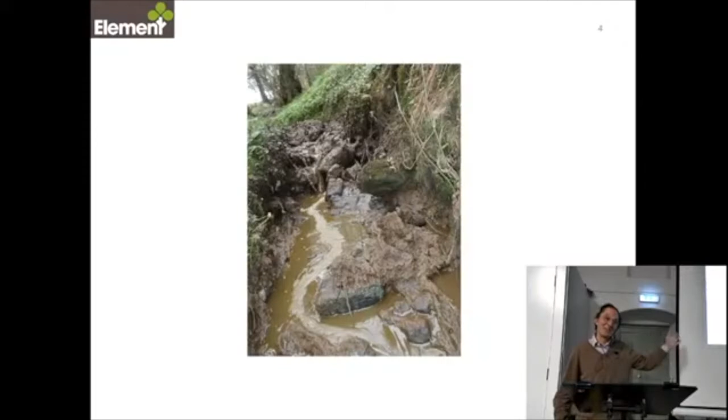So this is what we all think of when we think of water - lovely, clean, beautiful water. But this is what I usually think of when I think of water. It's not terribly clear, but basically it's a filthy sheugh. And that's the bit that I'm interested in, because this is out there pretty much everywhere you go. You only have to walk around a corner and there'll be another dirty field with pollution down the side of it. It's something that we need to sort out.

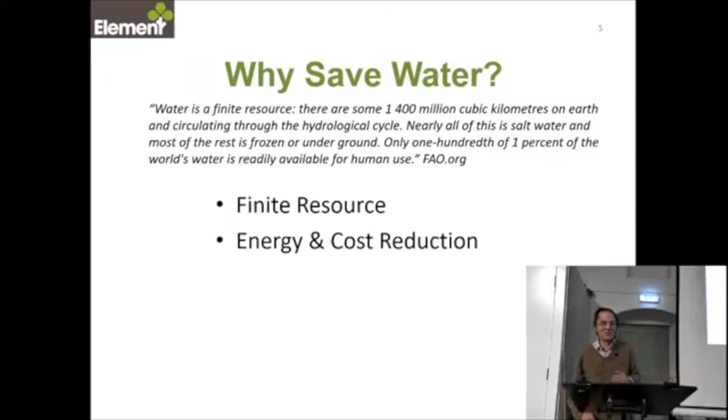So water is a finite resource. There is a limited amount of it on the planet, and there is a very limited amount of it that we can actually drink, that is readily available for us to use. So it is important that we save it. We also expend an awful lot of energy and a lot of money getting the water around the system. We spend an awful lot of energy and money treating the water when it's coming out of the system - actually we spend a lot more treating it. So we need to reduce those things because they're tied to carbon emissions, tied to carbon emissions. And obviously, it's all about protecting the environment.

Some of you may have heard of the water hierarchy, and this is what people talk about when they start talking about water efficiency. This is more of a commercial slide, but really what we're saying is, it's mostly common sense. Minimise the amount that you use at the front end.

I actually don't believe that the alternative water use should be where it is on that slide, so I'll come back to that in a minute.

Once we've eliminated everything, then reduce as much as possible, then reuse anything we can, then recycling, which is more on the commercial scale, and finally dispose of as little as possible.

So I mentioned alternative water use. I think that should be right down there, because I think it takes away from the fact that we should be minimising before we start to think of alternatives, and I'll come on to that in a minute.

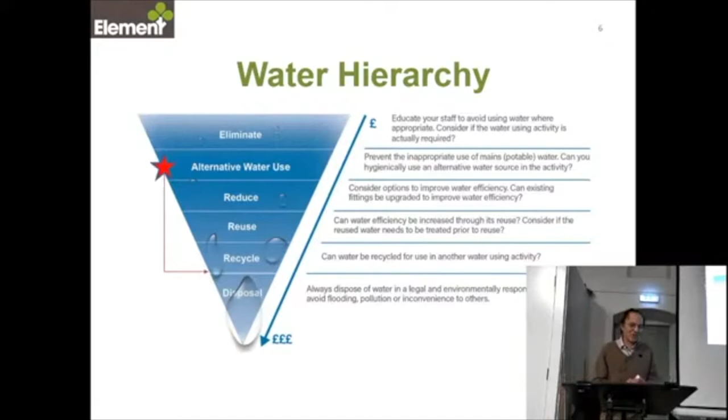And of course, we interrupt it on the way, use it, pollute it, chuck it out there again, treat it, mostly.

So what happens when the water hits the ground? We get runoff, and most of the water that we use is from runoff. In the countryside, 10% of the water ends up as runoff. In urban areas, 55% ends up as runoff. And then we wonder why we get flooding.

But also importantly, if you look at the infiltration, we get 50% infiltration in the countryside and about 15% when we're in towns. So anywhere that's urban, we're reducing the available water that is coming to us.

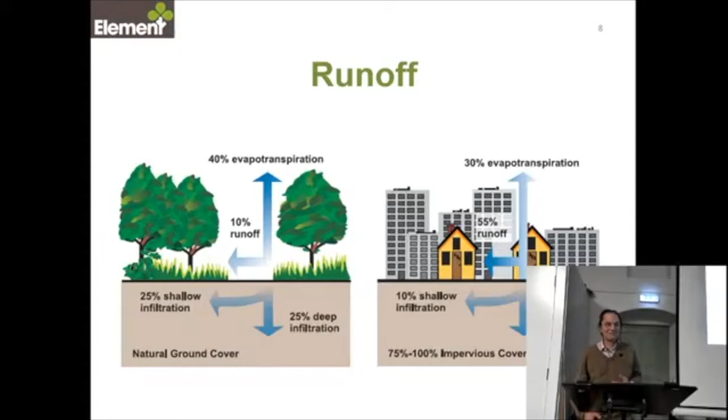Okay, so water sources. We all immediately think of the first one, which is mains water. And that obviously is water that has had to be treated and moved before it gets to us.

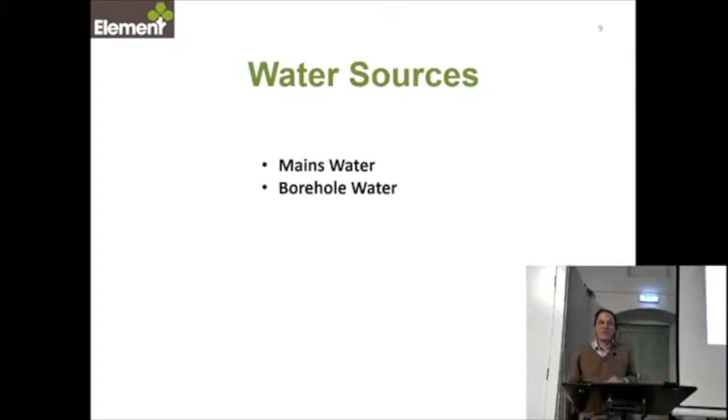We don't often think of borehole or borewell water unless we've had experience of it, but we actually use a lot of water from aquifers under the ground. This is water that sits generally in bedrock aquifers, although you can take it from what are called superficial aquifers as well. We'll come on to a bit more about that later.

Then there's rainwater, and rainwater harvesting is a big opportunity for reducing a lot of the water that we use. We don't do very much of it. Believe it or not, there is an incentive, which I'll mention later. But even simple things like water butts in the garden, instead of using mains water, can make a huge difference.

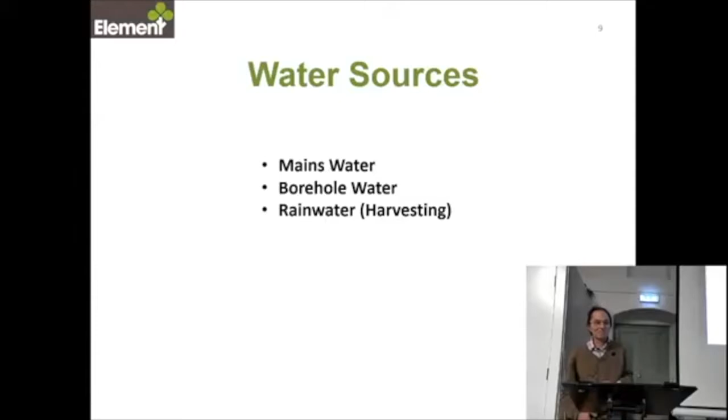Reused and recycled water - we'll talk about that a bit more, but there's not that much you can do in terms of recycling at home, although you can do it in commercial settings. And then there's surface and seawater, which you'll know of happening abroad, but not really here. So those are really our main water sources.

So what about here particularly? Where does the water come from here? Well, the water for here all originates up on the Garron Plateau in the Garron Blanket Bog. Your water here, I'm sure some of you will remember, used to be probably quite peaty when you got it, a bit discoloured, because the Blanket Bog had been drained, and so it wasn't doing the filtering that it needed to do.

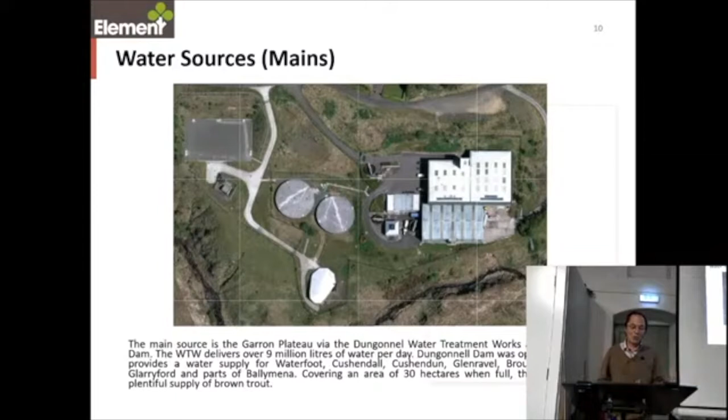Big pat on Northern Ireland Water's back with the RSPB - they restored about 2,000 hectares of the Garron Plateau, so that it now filters the water much, much better, and they have to spend a lot less time and energy cleaning it before it comes down to the dam where it's treated, and then it goes on down to feed most of the glens and a big chunk of Ballymena and Broughshane as well. So that's where all your mains water in this area comes from.

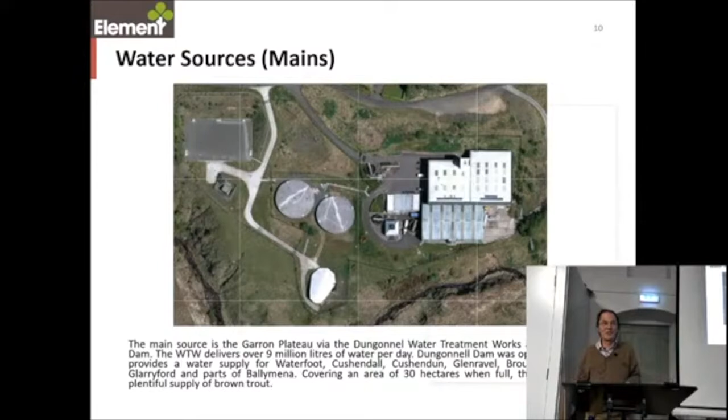It's local, which is a good thing. Then there's the other water source I mentioned - the main water source we have in Northern Ireland is borehole or borewell water.

This is a typical borehole. You've got a bit of overburden soil at the surface, then you get through a bit of subsoil, and you reach what's called the superficial layer, where you tend to have gravels and sands. These were generally deposited in the ice age by retreating glaciers, so they cover quite wide areas and can be quite deep. Below those you eventually get down to bedrock. In between you might have layers of clay and glacial till, and some of our most important aquifers in Northern Ireland are bedrock aquifers, particularly in the Belfast-Lisburn area.

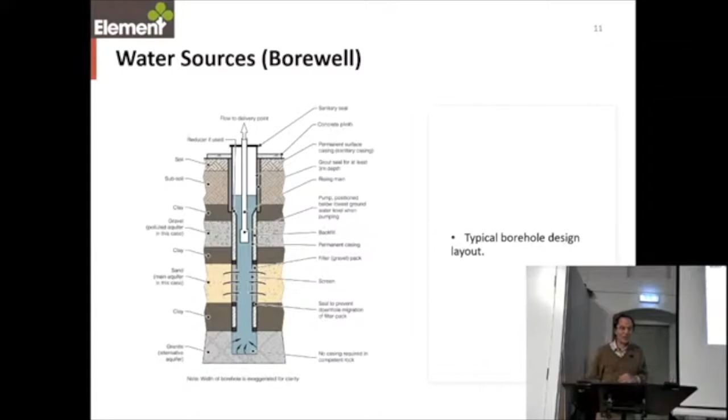Just in case you thought we didn't use that much borehole water, all of the water used in the Ulster Hospital comes from a borehole. They are currently licensed to abstract 432 metres cubed per day, but could actually abstract up to 3,500 metres cubed per day. It's a massive sandstone area which runs down from Belfast over to the Newtownards Hills and then down to Lisburn.

When you go and buy your fizzy bottled water, there's a particular make sold in Northern Ireland that is made by a well-known fizzy drink manufacturer. All of that water is abstracted from that aquifer, then pumped about 12 kilometres to their new factory, where it's simply filtered or carbonated and put straight into bottles. So that's where that well-known brand of fizzy water comes from. Borehole water is important in Northern Ireland, and it's a good resource - even in some of our basalt aquifers, it's still possible to get a good abstraction rate.

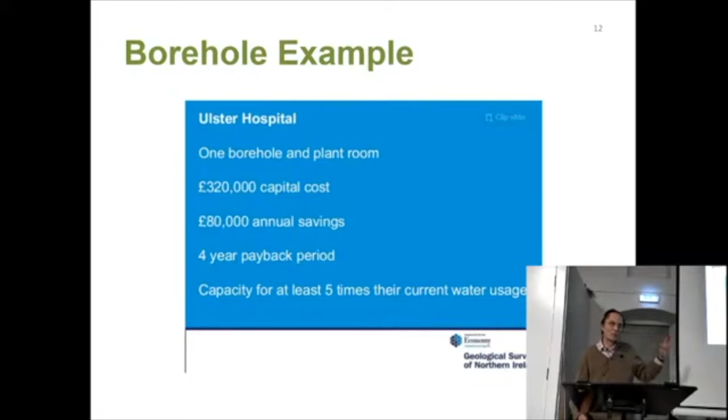So what do we use water for? We've effectively got potable and non-potable uses. Potable means it's safe to drink. Typically, mains and borehole water are treated as potable. You probably think of them as different, but they're both treated before they get to us, and both inspected regularly by the Drinking Water Inspectorate, part of the Northern Ireland Environment Agency, and they have to meet stringent legal standards. I say they have to - they're meant to meet it all the time. Occasionally things go a little awry and they just miss it, but generally not by much.

Non-potable water is really everything else. Grey water is water you typically get from used shower water and used bath water. Black water is the really nasty stuff that no one likes to think about very much. Some of it, obviously maybe not the black water, can be used for flushing loos and washing machine use, that sort of thing. So those are really the main different types of water that we have.

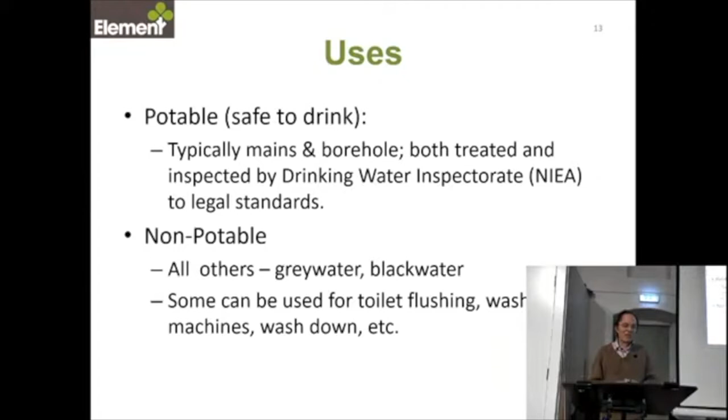The next thing most of us don't think about is that nearly all of the water we use is processed in one way or another. I know that word 'process' isn't very nice, but we process it in order to make it potable, to make it hot or cold, and by using energy to get it to the places we need and to get enough pressure where we need it. All of those things add value to the water, but they also add cost and carbon emissions.

The one we obviously think about quickly is that to get your water to come out of your tap, it's got to be pumped there. To get a flow, you've got to pump it around - the pumps are electric, and we're moving it big distances. We don't have the topography that they have in somewhere like Scotland, so we tend to use a lot of energy pumping water around the network.

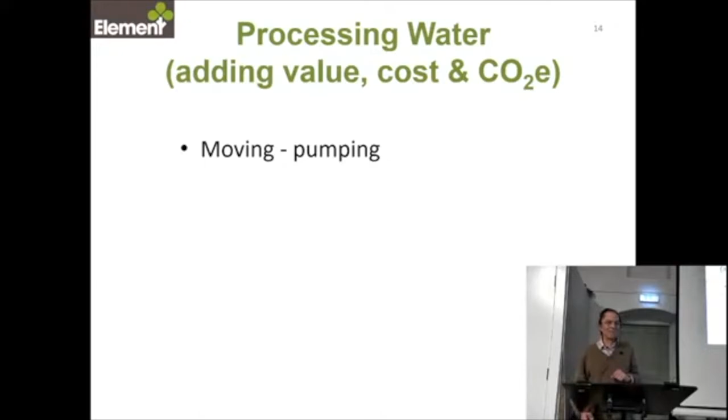Interestingly, we also have the longest length of pipework per head of population anywhere in the UK - I think that's the right way around - so we have to use more energy getting it around.

Heating - all the hot water you use in the house, every time you shower, every time you have a bath, every time you wash anything up - domestically you've got to get it to about 65 degrees to make sure it's not Legionella affected in any way. If you're using it commercially, quite often it's steam, in which case it's getting right up to 100 degrees. There's a lot of energy involved in getting the temperature up.

Cooling: obviously we're chilling and freezing things all the time, and even in offices they have these mobile chillers which are constantly using energy all the time just to keep it cool to sit there. A waste, if you ask me, but there we go.

Pressurizing: we probably don't think of that one so much, but obviously if you turn on all the taps at home at the same time, it's going to reduce the amount of pressure, so you've got to pump it even more to give you the pressure to get an even flow around the house. So all of those things add value, add cost, and add carbon emissions. You can sort of see where I'm going there.

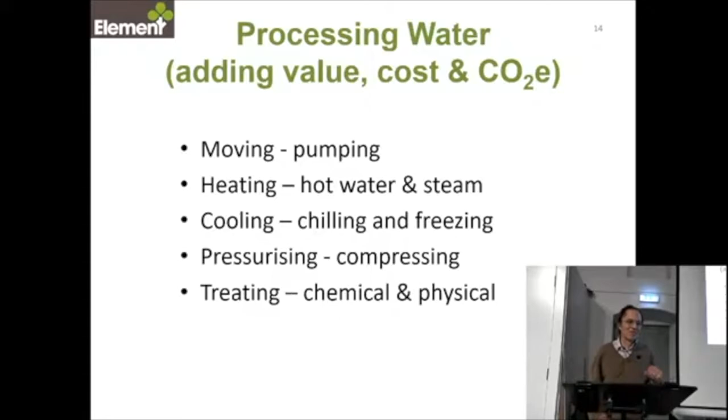Oh, and the last thing, of course, treating. Chemical and physical treatment, so we're treating it on the way in before we get to drink it in order to make sure it's clean. That could be various different types of treatment, but anyway, it's treated on the way in, and then there's a large amount of treatment on the way out, because obviously it requires work.

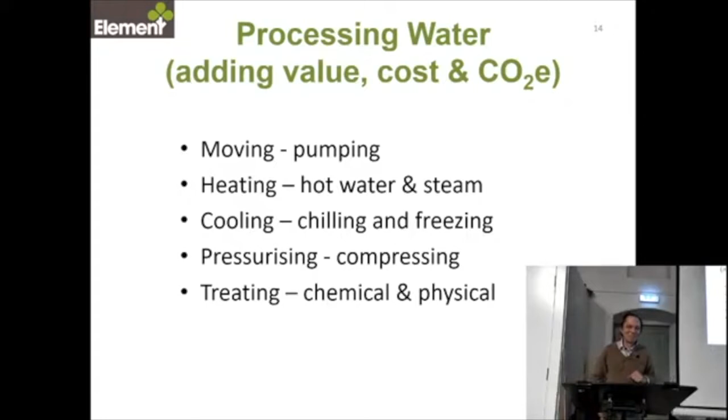This is the fun bit. Disposing of wastewater. We all probably know about our domestic foul wastewater, and there are really two ways that can go. If you're on the main sewer, it goes into the main sewer and it goes to the main sewage treatment work that serves your area, where it's treated, and then, surprisingly enough, out it comes, and it goes back out into the environment again.

If you're not on the main sewer, then you'll either have a septic tank or a packaged sewage treatment plant, and that will do the same thing that the main treatment works does, so it will get it down to a standard that's acceptable by the NIEA before it goes out into the environment again. You can sort of see where I'm going with this, can't you?

Then if you're a commercial operation, you'll have what's called foul water, and you'll have trade effluent. It's quite tricky, trade effluent, but basically any water that's used in a process and then comes out the other end is treated as trade effluent, and it's treated differently from foul sewage when it comes to the price and how it's treated and that sort of thing, and who controls it.

Basically, if it's going to a main sewer, it's controlled by Northern Ireland Water, and the business will be given a discharge consent, which gives them the limits that trade effluent has got to meet. So it will tell them whether it's allowed to have any fats, oils and greases in it, whether it's allowed to have any ammonia, what levels of biological oxygen demand and suspended solids,

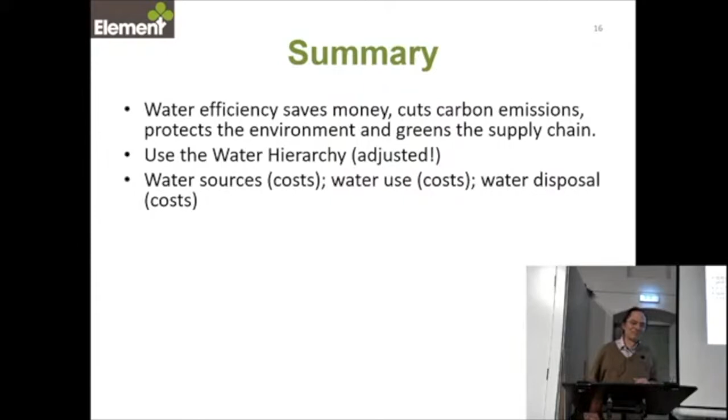Okay, so quick summary of that. Water efficiency saves money, cuts carbon emissions, protects the environment, and greens the supply chain. If we use the water hierarchy with mindful adjustment, that's a really good way of addressing it all. Water sources cost money, water use costs money, water disposal costs money, and they all produce carbon emissions. So save water, save money, save the planet.

Okay, now we're getting into the boring bit, which is the maths. Yes, we're getting into the maths. Most of you won't know this unless you run a business or you have your own meter on your water. But every cubic metre of mains water that comes into your building and is used costs £1.09 per cubic metre. And that's without any of the standing charges or other charges that might get attached to it. And a cubic metre, you can imagine it, it's not that big, it doesn't take long to use a cubic metre. So £1.09 plus the standing charge.

If you're using borehole water, you've got your pumping costs, your treatment costs, there'll be a licence cost. If it's commercial, probably a licence cost. If it's domestic, maybe not. Rainwater harvesting, again, you've got costs, you've got pumping and you've got treatment. Nearly all of these things, there are costs involved. But just bear in mind that mains water cost, because we're going to work on that.

So if you take a 1-inch hose, at a typical mains water pressure of just under 1.5 bar, the flow rate through a 25mm orifice at 1.47 bar is 5.8 cubic metres per hour, that's going to cost you £6.32 an hour. So if you leave a hose running, just an inch hose, for an hour by mistake, £6.32. That's what it costs at the moment. And the prices are likely to go up.

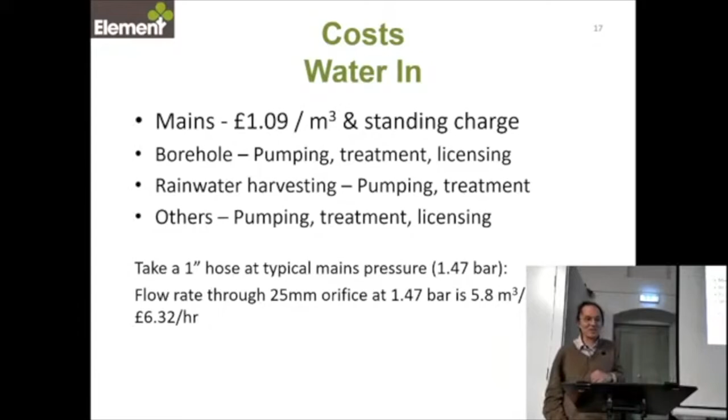Okay, so there's a bit of maths here. This is heating water, and it's just the standard formula for heating water, and the column on the left gives you the cost for heating water to 65. This is using gas at about 4p a kilowatt hour. Everyone happy about kilowatt hours? This is how they measure your electricity, it's just a measure of energy. Anyway, to 65 degrees, using 4p per kilowatt hour for gas, £2.60 a cubic metre just to heat your water to 65 degrees.

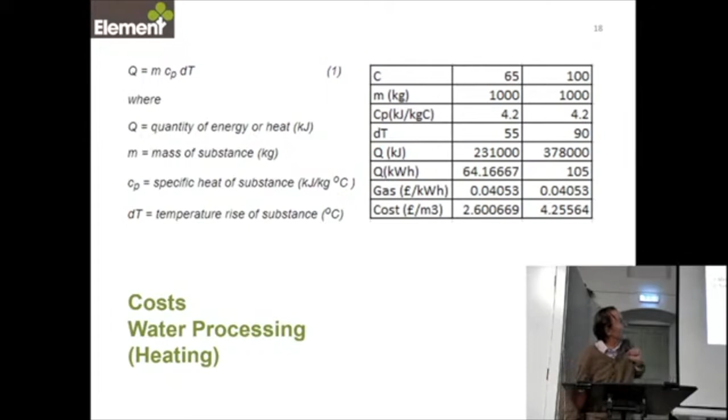The one on the right is heating it to 100 degrees, which is sort of a steam calculation, but it's not, because there's lots of other things that are involved in that. It will be more. So that's £4.25 a cubic metre heating steam to 100 degrees. Okay, dirty water out. Main sewage, £1.82 a cubic metre.

Trade effluent, now it's a bit complicated. Trade effluent is calculated using an exciting formula called the Mogden formula. And the Mogden formula uses a whole load of things, but it basically works out how much it costs depending on the strength of the sewage, based on the suspended solids, so that's all the mucky stuff floating around in there, and the biological oxygen demand.

Biological oxygen demand, really quickly, you've probably all seen pictures of dead fish floating in rivers at some stage, yes? So when you see a pollution incident, that is because organic matter has been flushed into that river, and the organic matter has a biological oxygen demand. It sucks the oxygen out of the water. The bacteria suck the oxygen out to be able to do their magic. And when you get a fish kill, usually, not always, unless it's a chemical fish kill, it is because organic matter has been flushed into a river.

That organic matter, the bacteria in that, have sucked the oxygen out, so these are aerobic bacteria, in order to do what they do, and that means there isn't enough oxygen for quite often the plants as well, but certainly the bigger fish to be able to go on breeding.

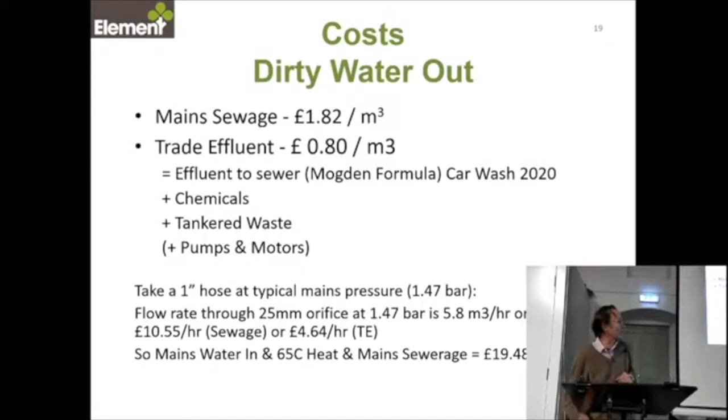And that reflects what it costs Northern Ireland Water to do the job. So once you think about it in cubic metre, 20 quid basically. Water is expensive and sewage is expensive, and the reason it's expensive is because of what we have to do to be able to use it, and all of those things pretty much have carbon emissions attached. Yeah, there we go. Every drop costs money at least twice.

Carbon emissions. Okay, so it's quite tricky doing carbon emissions with water, because if you can imagine that there's a massive infrastructure. They are busy with these massive pumping stations in order to move water around. They're then busy treating it like your treatment plant up here on the top of the Garron Plateau, so that you can have clean water coming to you.

But the big treatment is on the way out, is dealing with the wastewater, because it has to be aerobically digested. So that means you've got to get air into the wastewater, oxygen into the wastewater for the aerobic bacteria.

So if you think about it, you've all heard of anaerobic digestion plants, maybe, producing gas and electricity. They're anaerobic, so they don't have any air in there, and the result of that anaerobic digestion is that they produce these gases. The main one is methane. We call it biogas, and everyone says it's a good thing because it can be used to produce energy and deal with our energy problem, but it produces these biogases, which include methane, hydrogen sulfide, and sulfur dioxide.

And you may also have heard of farmers who have lost their lives when they've gone down into slurry tanks. Tragedies that we have in Northern Ireland, and that is because the slurry forms a crust when it's in the tank. Underneath that, if it's not aerated, it's just sitting there, you get anaerobic digestion, and you get exactly the same thing. You get methane, hydrogen sulfide, and sulfur dioxide. Sulfur dioxide smelly, but the methane and the hydrogen sulfide, particularly the hydrogen sulfide, are colourless and clear and heavier than air, so you break the crust, the gas escapes, you don't smell it, you haven't got a hope.

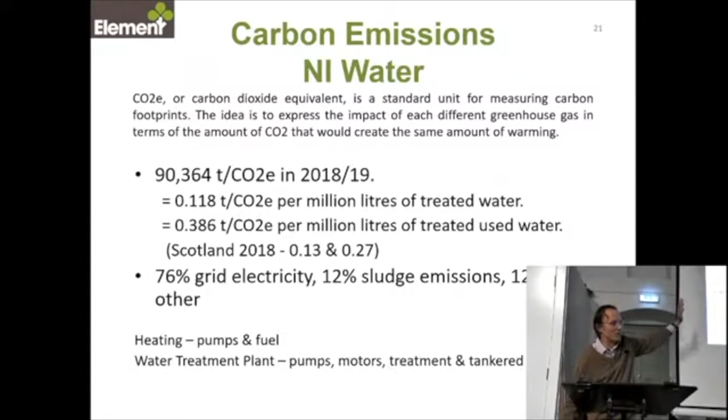Carbon emission example - sorry, more maths. We've got 118 at the top, which is the water in, and 386 next, which is the sewage out. If we took a volume of 21 metres cubed - sorry, this was earlier maths I did, so it's a random volume, you could use 1, you could use 7 - we'll take 21 metres cubed.

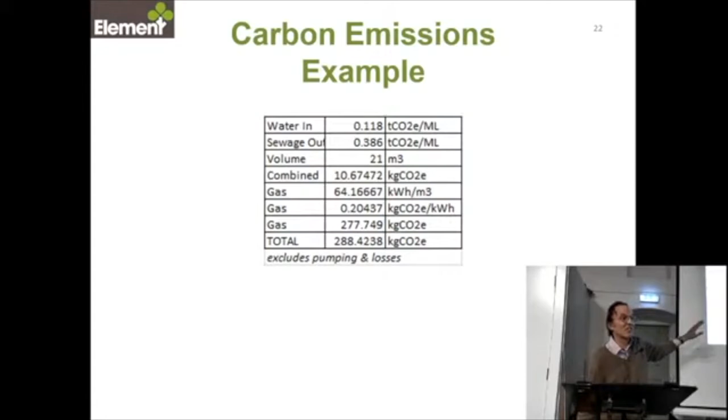A typical Northern Ireland person uses 150 litres of water per day, which I think is 55 metres cubed a year. So this is about half a person's use per year, roughly.

Combine it - 10.67 kilograms of CO2e, add the gas, add it all up, 288.42 kilograms of CO2e in 21 metres cubed. And that's not all.

Carbon emissions from a Golf GTI 5-door, sporty Golf, 143 grams per kilometre. So 15,000 kilometres is 2,145 kilograms. So 1 hour of hot water is equivalent to 2,000 kilometres in a Golf GTI.

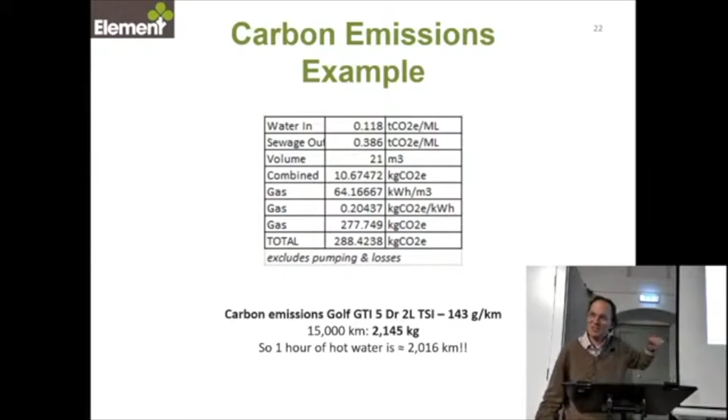That's the carbon emissions - you then get your head around the carbon emissions. I won't spend too much time on that, in case I've got the maths a bit wrong, I won't spend any longer on it.

What's the cost of a person per year? I haven't got it in front of me, but I could probably work it out pretty quickly because it's 55 cubic metres, and there's a figure for the rough amount of hot water you use. It's actually not far off 50% hot to cold, but it also depends on the type of fuel you're using to heat your water, and where you're getting it from. For example, if you were using electricity to heat your hot water and getting it from one of the producers who is less carbon efficient in Northern Ireland, then it's a massive figure - more than twice the gas figure for 2018.

It's coming, it's another - let's do that one at the end. Hold that thought.

Water costs money and energy. Dirty water costs more money and energy. Hot water costs even more money and energy. A small amount of waste adds up to a large amount of cost and emissions over time. Wasting water increases carbon emissions and accelerates climate change. Save water, save money, save the planet.

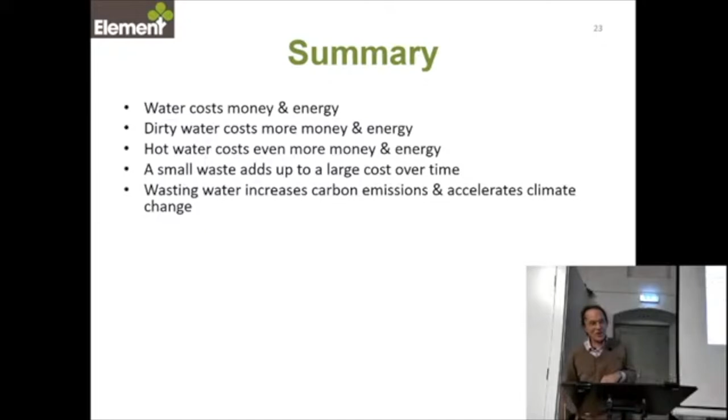Okay, so this is coming back to the water hierarchy - this is what we can do. The NI Water Annual Report 2019-20 shows we use 70% more water today than we did 40 years ago. So we're an awful lot cleaner, but that's a heck of a lot of water. That's probably because we don't have to go to the hand pump to get it up from the bottom of the well, to bring it in, to carry it in. It's extraordinary how little water you use if you've got to make an effort to get it.

It's also extraordinary how much less water you use if you have to pay for the water at what it costs. The average person could reduce their water usage by around 40%, and NI Water's total water demand by 25%. That's an interesting little fact. That 25% reduction is actually the equivalent to the amount of water that Northern Ireland loses each year through leakage - and that's one of the problems with having an enormously long pipe system.

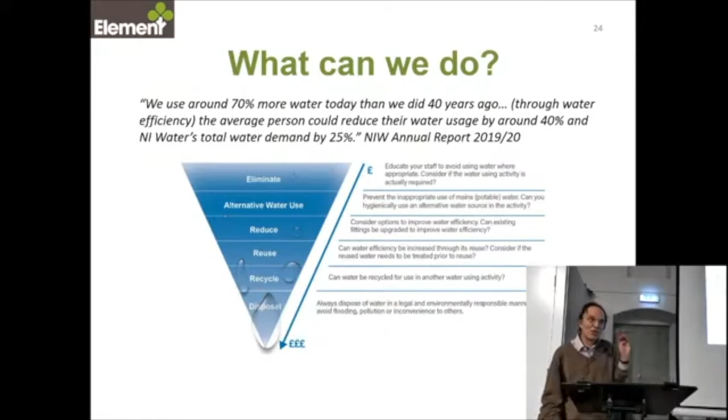So these are the things you can do, and we quickly covered that earlier, so I'm not going to spend hours on it. But I'm going to give you a quick idea of what the commercial side of this is like.

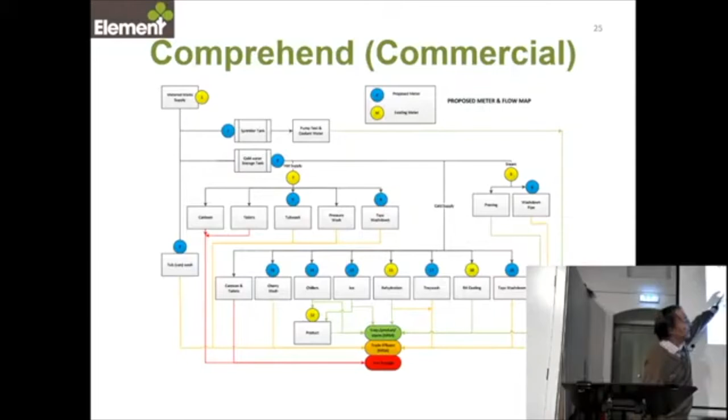First thing you need to do, if you're going to do anything about saving water, is understand where your water goes. This is a water map for a job I did for a company, which shows their mains water coming in, where it goes - they've got a big sprinkler system, a big cold water storage tank - and it goes to various different things: canteen, toilets, tub wash, pressure washer, through various processes, and then out to different places.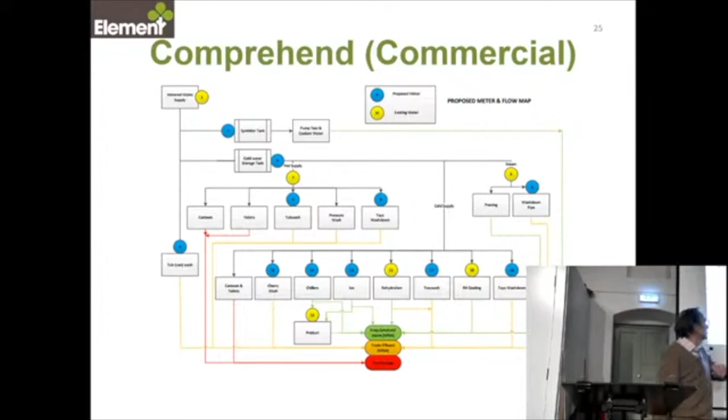That includes water that goes into product - for a food manufacturer, water will go into the product. Then there's trade effluent, which is water that goes through a process. Here's a tub wash, for washing out equipment in a food processing place. So that's a trade operation, treated as trade effluent.

And then at the bottom we've got foul sewage, which is the stuff that comes from the canteen and the toilets, although they do get a bit of non-return to sewer allowance on that as well. All those little coloured dots are either existing meters or where we've suggested they put meters, so they can understand where their water goes.

Because how the water goes out affects how much it costs them. And they can't possibly understand how to reduce the cost of all this if they don't know where the water's going - and more importantly, where they're losing it. Because water has to go somewhere.

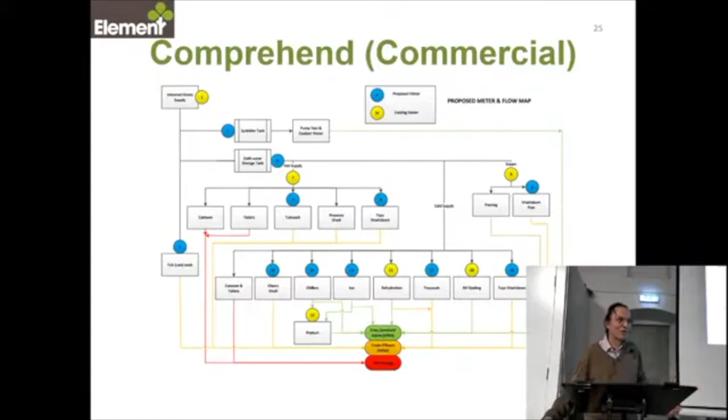So if you've got meters in the right places on the system, you can see where the water's coming in, but it's not going out, which means you've got a leak. And there are leaks in every system.

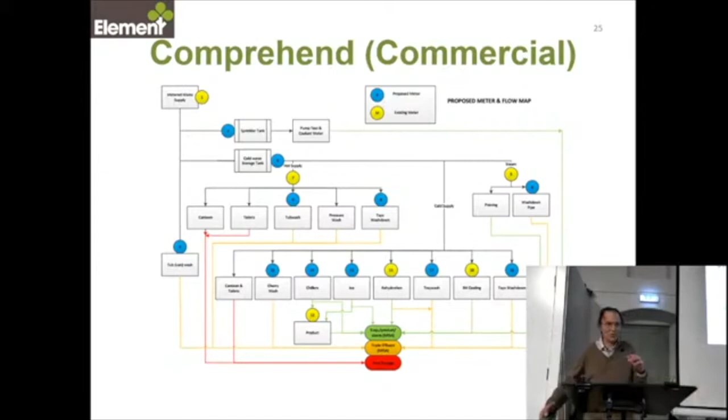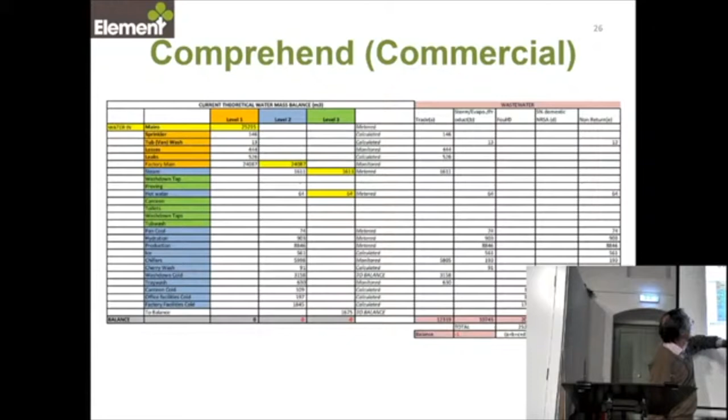This is what's called a water mass balance - this is the bit we were talking about. Once you've got all your meters, you can measure what's coming in, measure where it's going to, measure where it's going to next, and work out where you've got losses.

There aren't any losses shown on this because they don't have enough meters to work out where the losses are - they didn't when the job was done. But it does give them an idea of where it's coming in, where it's being used, and the different places it's going out.

They need to know all of that because, for example, if they've got a combined sewer on part of it, they've got storm water - every time it rains, the water's coming in and going onto their trade effluent or foul sewage, and they're paying for that.

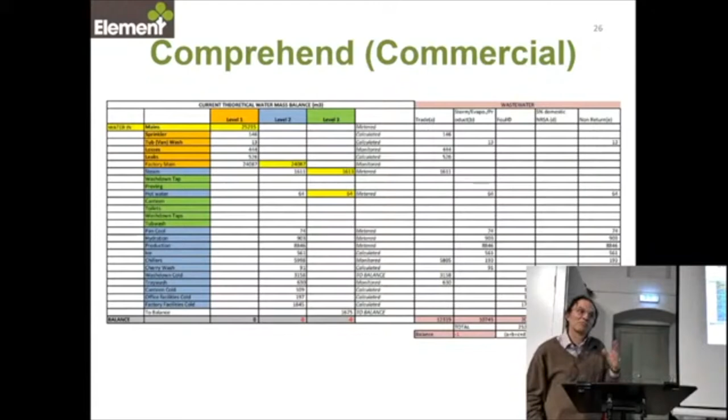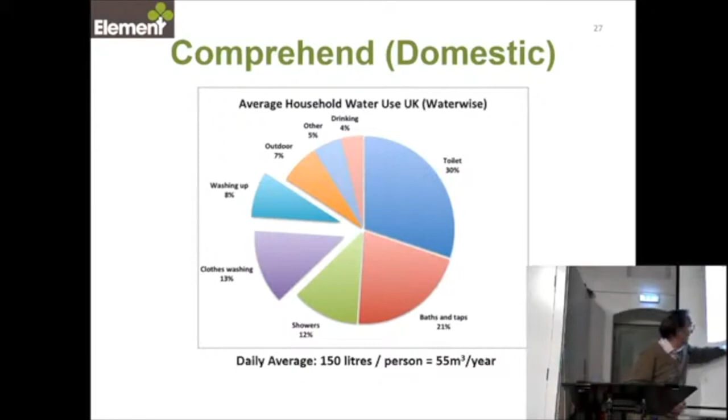So from a domestic point of view, it's a similar thing - you need to try and understand what you use and where you use it. 150 litres per person, daily average in the UK, 55 metres cubed per year per person - that's a big volume of water.

And the big figure there: toilet, 30%. Baths and taps, 21%. Showers, 12%. So those are three big areas that we can do things about straight away.

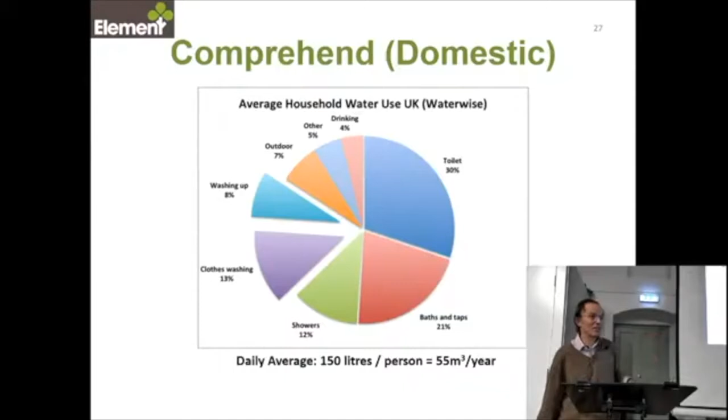People go off on a tea break, the hose is left switched on, they don't think twice about it - probably because they don't have any idea what it costs. They don't pay for it at home, so they don't understand what it costs, and they don't understand what it costs for the business either.

Why are leaks so important commercially? I think I mentioned it briefly. Oh, hang on.

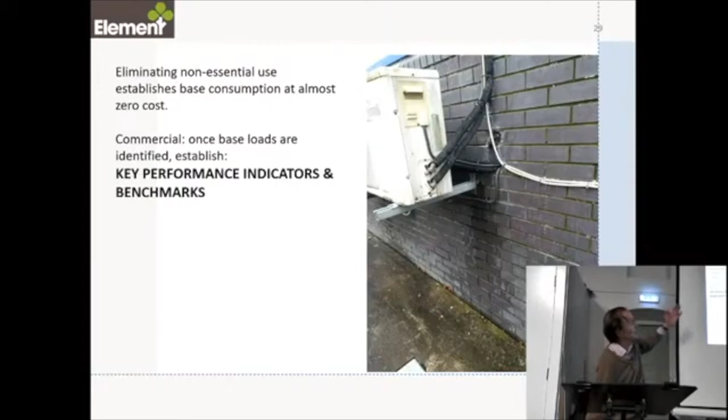So if you're in a commercial environment, you need to establish your base consumption, which doesn't cost you anything to do apart from a bit of time internally, maybe adding meters, but meters aren't very expensive for water, depending on the size of the pipe.

Once you've got that established, you can establish key performance indicators and benchmarks. So for key performance indicators, typically you'll be saying, I produce 5 million widgets a year, therefore this is the amount of water I use, therefore I use X amount of water per widget produced. That then gives you a measurement you can try to drive down. You just keep doing your monitoring and targeting and keep trying to push that figure down. And if it's going up, there's a problem.

Then benchmark is, if you can get hold of them, figures generally from other companies in your same industry, and normally there are benchmarks produced by quite a lot of people, like CIBSE, the Chartered Institution of Building Services Engineers. They'll produce benchmarks that you can use.

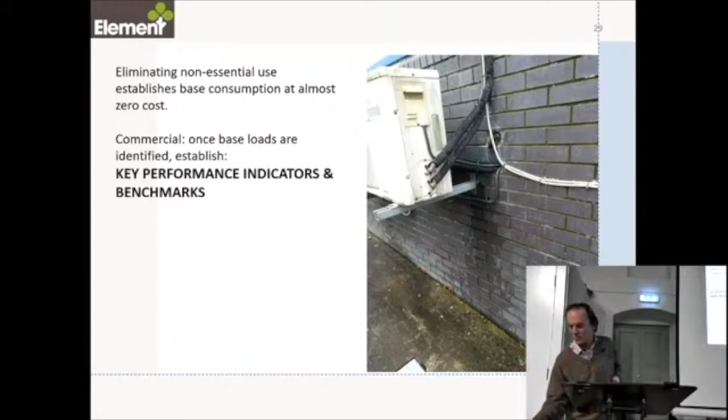How am I doing for time? Wittering a lot. Come on, press the wrong button. There we are. Can you see the leak on that one?

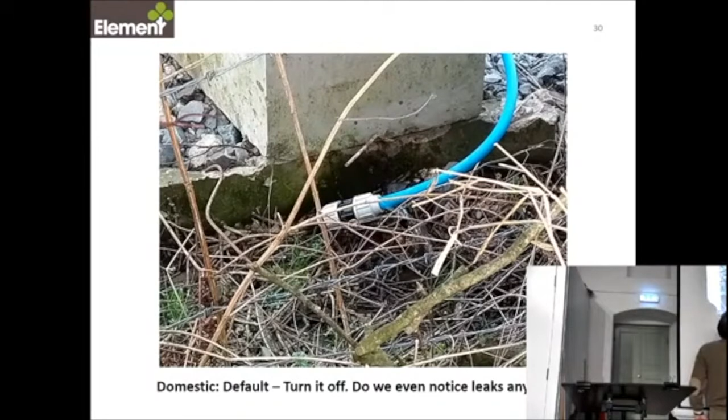I took a wander up my road, actually it was last winter, and I heard a trickling sound. There through the hedge was a trough for cattle water in the field, and you probably can't see it, but there is a leak. That leak was still there a week later. Didn't know who the farmer was. But that's probably full mains pressure, a good flow, maybe a litre a minute, just bang, bang, bang.

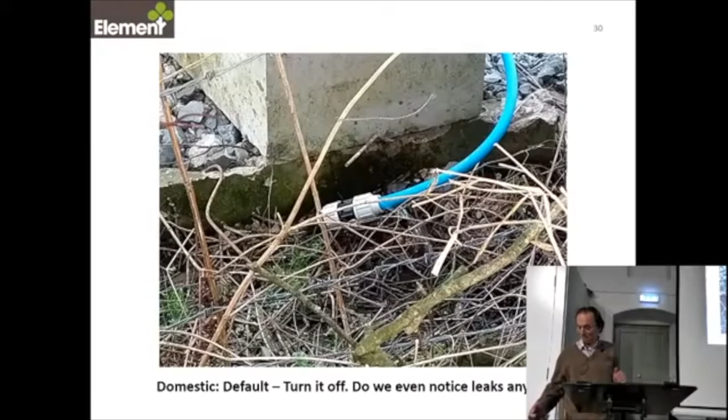Right, alternatives, yes, so this is lower down my hierarchy list, but there we are.

So borehole water has a very low incoming cost, because when you abstract water from the ground, it's licensed by the Environment Agency, and you apply for the amounts you want to abstract based on your borehole characteristics and the water features in the area, and they will license you a certain amount. If you extract less than 20 metres cubed per day, you pay nothing. That's a lot of water during the year, and for a business that's very valuable. There is an argument, I think, that you should be paying more for that water, but that's just my point of view. I'm happy to discuss that later.

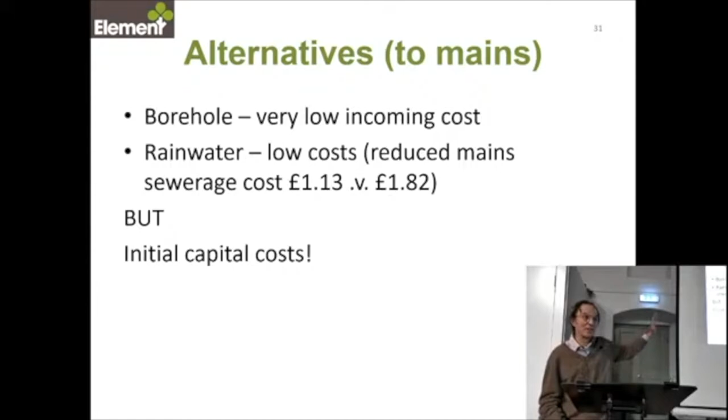Rainwater, again, low cost, and believe it or not, there's an incentive in that if you put in rainwater harvesting, your sewerage cost will be reduced from £1.82 to £1.13 for each metre cubed that you put in. There are rainwater harvesting systems you can get that are actually not that expensive, even on a domestic level. But initial capital costs for borehole developments are pretty expensive, especially at the big sizes. But the payback is very quick if the water is cheap. It doesn't save you anything on the way out. So, reduction.

Efficient domestic fittings.

Urinal control. Typically, if you're a gentleman and you walk into the lavatory and it's got urinals, the older type of systems are what are called fill and flush. There's a ball cock and it just fills and empties as quickly as it's turned down on the machine. Nowadays they have PIR recognition and solenoid valves which control what's going into the flush.

Better still, waterless urinals. Those of you who have frequented famous hamburger joints may have used the lavatories, and some of the best known names have all got waterless urinals right the way through. In fact, some really good hotels are now fitting waterless urinals in their public lavatories, which is a really good idea because it's a massive saving.

Taps, flow and duration. So really simple, this is all about minimizing the amount of water that comes out of your tap so that it's what you need. Typically for a hand basin, 3.5 litres per minute, which is an awful lot less than most of you will have. For a kitchen or utility room, 5 to 8 litres per minute. In fact, 5 litres per minute is fine in a domestic setting, 8 litres per minute maybe in a commercial kitchen. And those can be easily done.

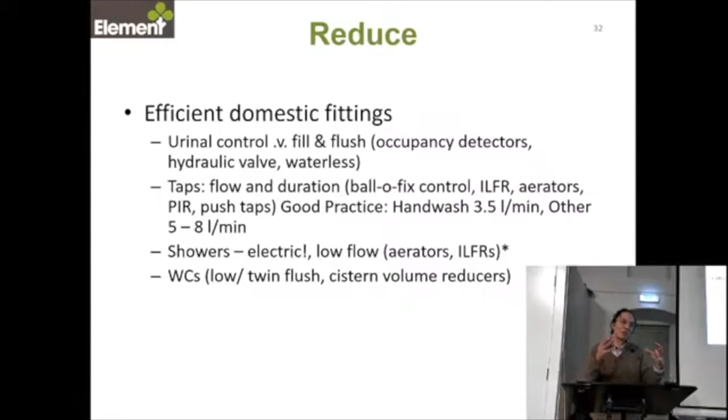Where are we going next? Oh yeah, WCs. If you've got the old type of WC, it's the old brick in the cistern job, which you probably all remember, but actually you can buy a thing - there are various what are called cistern volume reducers on the marketplace. Just Google cistern volume reducers and you can get them. There's a really good site, one particular make, which I better not say, and they have photographs of all the different types of cisterns, so you can recognise the type of cistern you have and then get the correct bag to fit in that cistern.

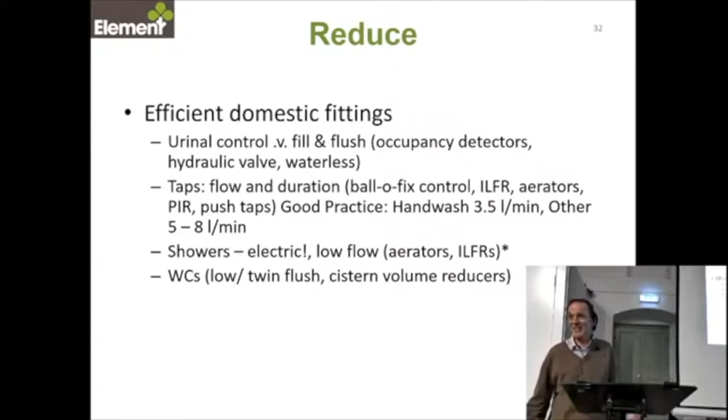Low flush, twin flush. You have to be quite careful with twin flush because they can be quite confusing. You can look at a twin flush and wonder which button do I press, unless it's really obvious. So you have to be careful with those. Anyway, moving on swiftly - wrong button.

There was a study for electric showers that identified customers with a mix. This is a study that was done by United Utilities in 2007. I know it's a bit old now.

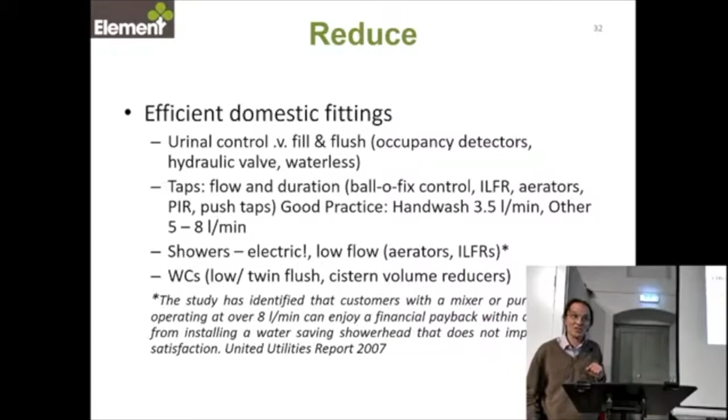Customers with a mixer or pump shower operated over 8 litres a minute can enjoy a financial payback within a few months from installing a water-saving shower head that does not impair customer satisfaction. So you can do it.

Okay, commercial fittings. There's a lot more you can do. Process flow control, fitting interlocks, limit switches, making sure that the default position is off. So it's something we do with a lot of machinery for energy saving, but basically it means that when the guy comes to turn the machine on, it opens the valve that allows the water to flow. Until he turns the machine on, the water cannot flow. That way, nothing is wasted.

Nozzles and sprays, there's a lot of cleaning down being done out there in commercial premises, particularly food manufacturing, and typically people will go and buy the cost-effective spray head or the one that the rep is selling you. But actually, nozzles and spray patterns is a complete science, and they have specific nozzles for specific spray patterns and flow rates. If you have a situation where you're washing things down, you should test them all so that you get the right thing for the job that you are doing, so that you're using the minimum amount of water. Take advice from the manufacturer of the kit as well.

VSDs, variable speed drives. These are also known as inverters, and this is for controlling an electric motor. What a variable speed drive or inverter can do is control voltage, frequency. Basically, it can respond to the activity that you're doing, so that if the amount of water that you need or the pressure you need reduces, the pump will reduce its speed.

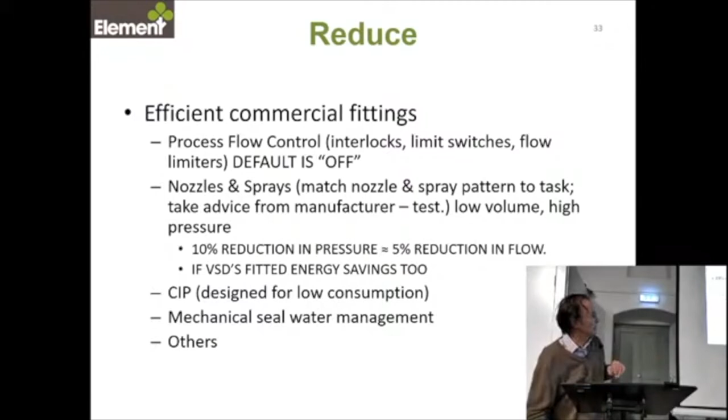CIP, that's cleaning in place, which are systems that are designed specifically for cleaning a process. They're built in, and they use a specific amount of volume, and they're programmed by computers. Yeah, I'm going to move on.

Okay, so reuse and recycle. Actually, this isn't that easy, because you can use cooking water for pets or plants, and you can use wash water for toilet flushing. It's quite hard work, actually, and if you're dedicated, you can do it. But to be honest, you're far better off doing all the other things first of all, if you want an easy life. And we all, I certainly want an easy life.

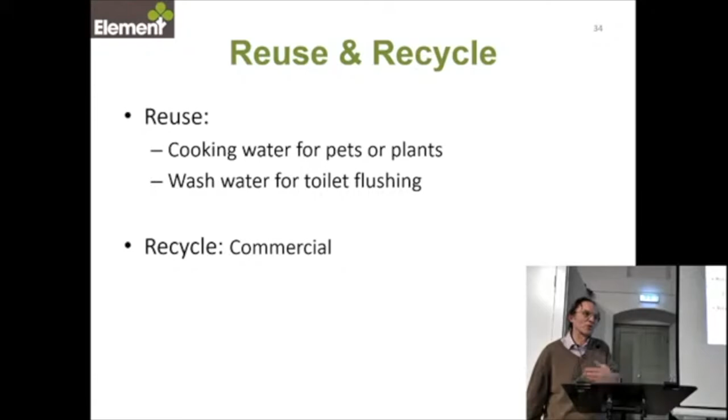Recycle, that's a commercial option really, because it involves cleaning the water to the extent where you can reuse it for a process. So generally it's a commercial option.

Disposal. One of the main things is make sure that as little stormwater as possible is going to the foul sewer. So if you've got an older house with combined drains and you're on the main sewer, just check out your drains. You can actually request a map of your drains from Northern Ireland Water, and it will show you whether it's a combined drain, a stormwater drain, or a foul sewer drain, what you've got.

Also, just have a check around the place to see if you've got a manhole that you can lift out front, and put some dyed water in. If you, for example, had an extension built on the house, quite often if the people doing it weren't completely switched on, they might have taken your rainwater downpipes into your septic tank feed, for example, which is exactly what I found when I moved into the house that we've lived in for the last 5 years, and 2 years ago I moved all my downpipes so that they went into the correct gullies.

Again, you can check, you can just lift a manhole, using chalky water or water with a little bit of white paint in it, preferably chalk-based, good for the environment, and that will come down your system and you can see where it's going, checking that everything's going in the right place. Minimise the amount of foul water going to the sewer. Doing all the things that we talked about, reducing water, will reduce the amount of foul water going to the sewer. Don't flush the loo any more than you have to. It's pretty straightforward.

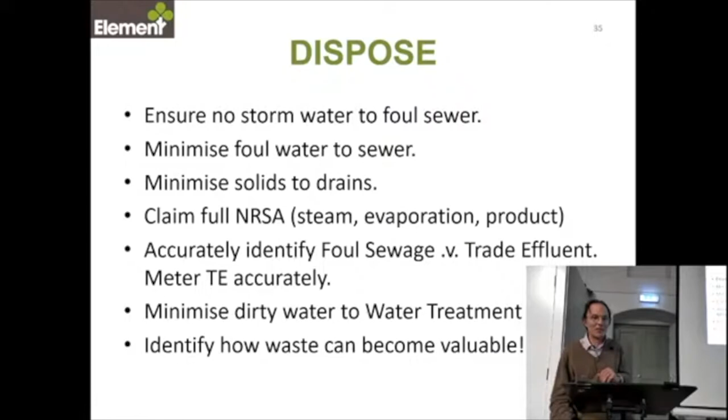Okay, I'm whipping this bit up. Honestly, I'll whiz through the next bit, don't worry.

So for commercial, comprehend your water system, make sure you understand what's going where, how, and how much. Eliminate every single bit of waste, non-essential use, all the leaks. Establish KPIs so that you can track from month to month. Continually meter, monitor, and target. It's the same for energy actually, so that's why we do all of that.

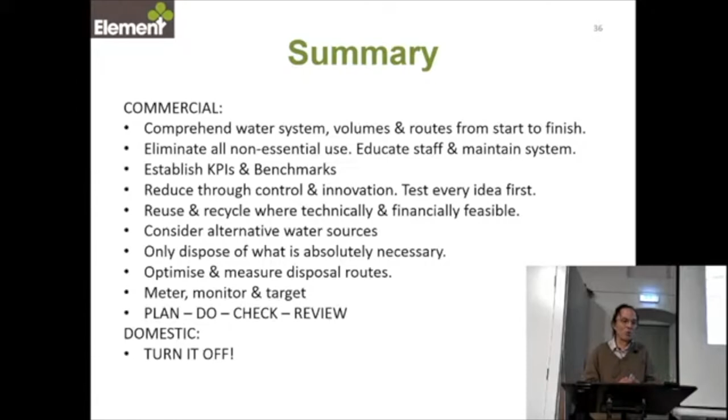Reuse and recycle where possible. Then, once you've driven it down to the minimum possible for your process, consider alternative water sources, because you don't want to be taking any more than you need to. And only dispose of what's absolutely necessary. Plan, do, check, review. Domestic, turn it off.

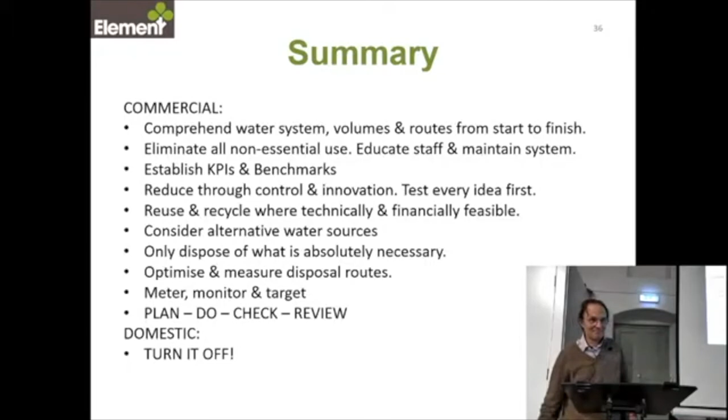Various sources of help for businesses: Invest NI, finance, HMRC, water efficient. Now this is slightly out of date, they're not called enhanced capital allowances. There's now the annual investment allowance, which means that at the moment, for this year and next year, I think I'm right in saying, everything that you spend up to £1 million, you can claim full tax relief in the first year. Any accountants here? Full writing down allowance in the first year. It's basically a big cash flow aid. And then these two are really good, healthy places to go for advice about this sort of thing, if I haven't put you off it forever.

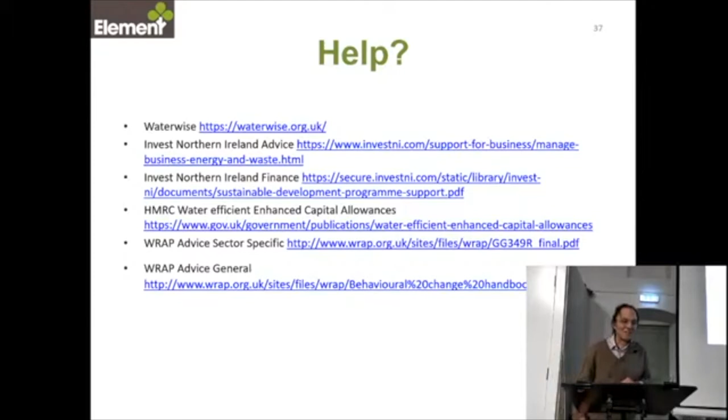Without getting too complicated, you can put a lot more power onto a three-phase system than you can onto a single-phase system, which is why most businesses put in three-phase systems if they can.

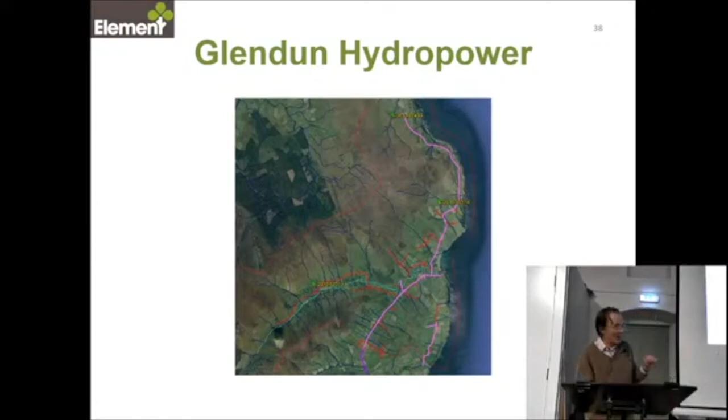One of the biggest costs in developing hydropower is the civil works. So if you're going to be grid connected, which you generally want to be in order to be able to export electricity and earn some money from the stuff that you cannot use, then you want to be as close to the grid as possible. So what we're generally looking for is where the grid and rivers and streams intersect.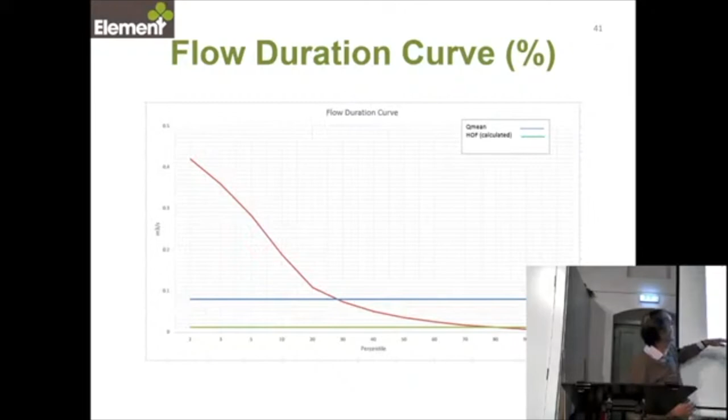And all the streams and rivers in the Glendun catchment area have fisheries protection because they have, I think, eels, lampreys, salmon, and therefore there is what's called a hands-off flow, which is set by the Environment Agency. You don't know what that is at the beginning, but typically it's going to be around 80 to 90%. So that means that at the hands-off flow, you can't use any water. With an 80% hands-off flow, you can only use the water above that.

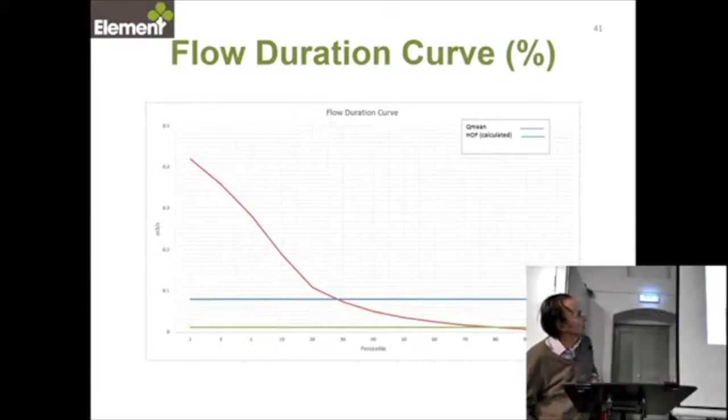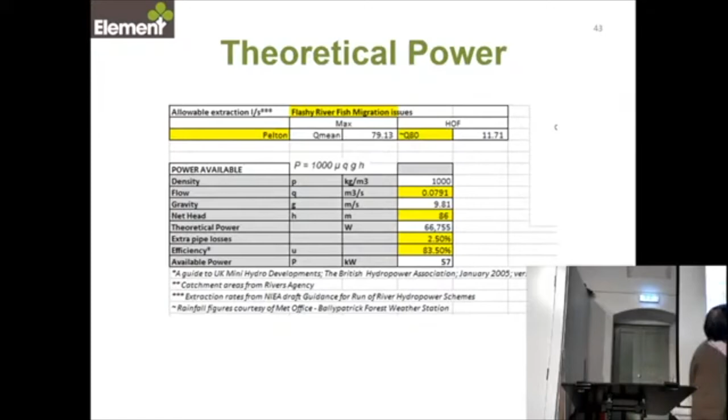Getting the head, which is the height, you'll basically overlay the contours when you're doing an initial feasibility so that you know how far the water is going to travel from the start point to the end point, because that gives you the potential energy along with the flow. Then you're using the basic power available formula, which will give you an initial idea of what you're going to get. This says 57 kilowatt. I think that's pretty high, never mind.

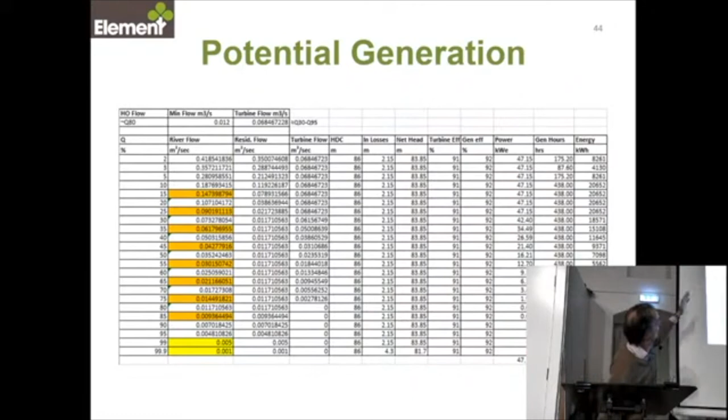Then you look at potential generation. You're taking your flow duration curve flows on the percentiles, working out what the residual flow is after you've taken off the stuff you can't use, what goes through the turbine, what's lost in the turbine, the net head, so what's left in terms of height, the turbine efficiency, the generator efficiency, and that gives you the power available from the power curve for the generator, the number of hours you're going to be generating at each of those points, and then the amount of energy you're going to generate in a year based on the flow duration curve.

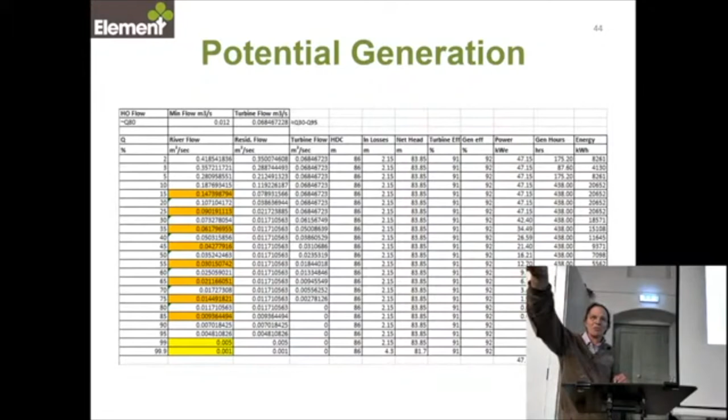Now this is all based on a theoretical flashy river, because to get this accurately you would need to monitor the flow in the stream or river for a period of at least a year. So this was based on the amount of catchment, and there was a flow monitoring station, I don't know if it's still there, right at the mouth of the river, literally after it's gone under the bridge before it goes into the sea. So we calculate how much we can get.

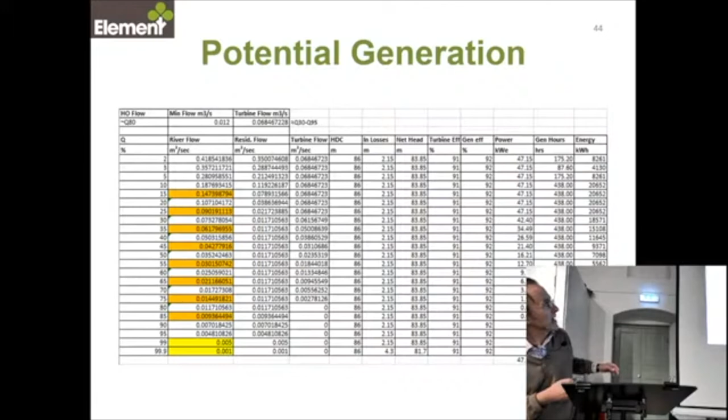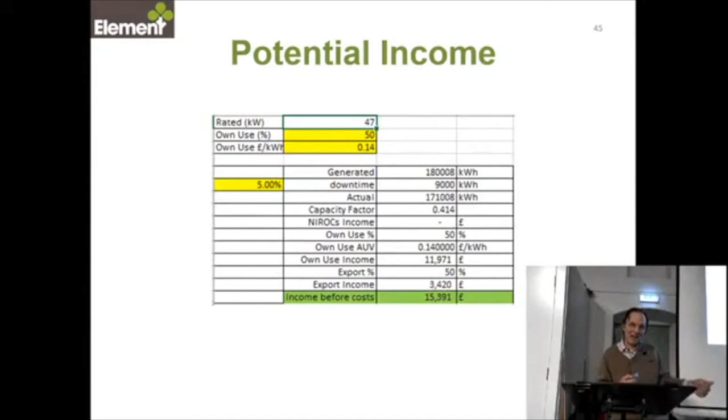And then we can work out the income. NIROCs don't exist anymore. The key thing is the amount you can use yourself, because if you're paying somewhere between, I don't know, 15 and 17 pence a unit for your electricity, then replacing that is really valuable. If you export it onto the grid at the moment, you'll probably get about 5 or 6 pence a unit. So there's 3 or 4 times the difference in value between export and what you use at home. And bearing in mind that the cost of these things is always high, you end up with long payback times.

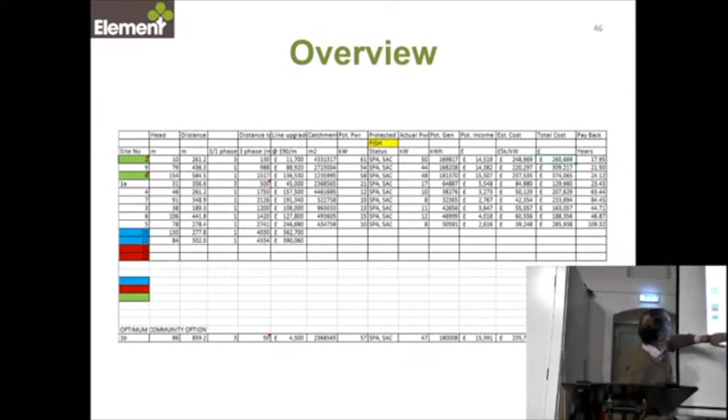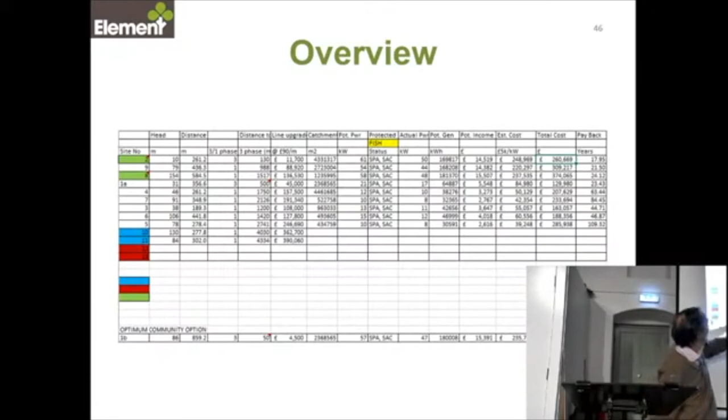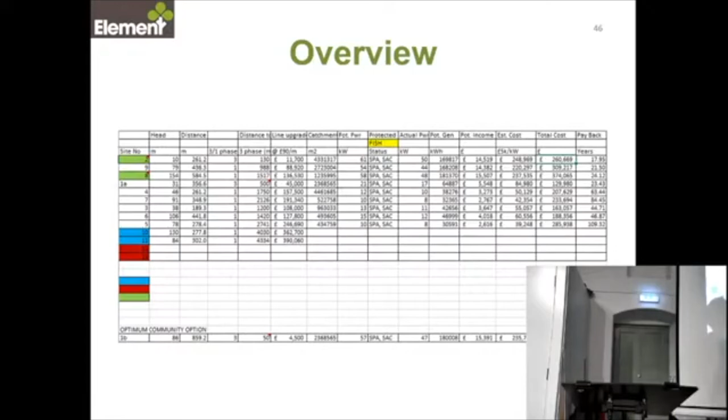So what we did is we took each of those sites. The first couple we binned immediately, the second couple we binned because they would have to have an extended grid, and then we worked through all those things that you saw: how complicated they were going to be in terms of environmental protection to install, what size you could put in each one, what you might earn, what the total cost would be, and what the payback would be.

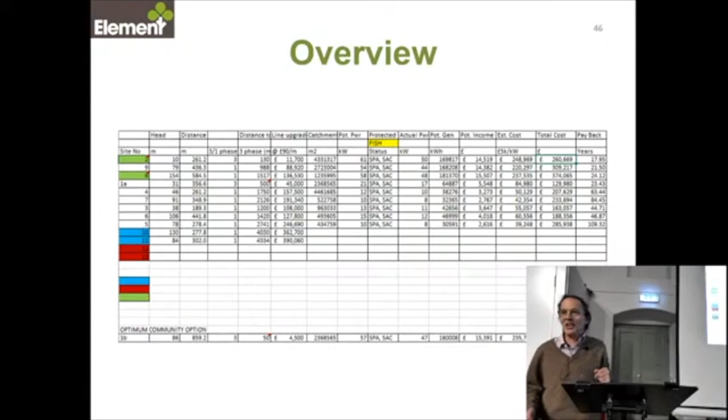And you can see at the top one, 17.95. Actually, that was for, I think, 1B. Oh yeah, 1B. This was the community scheme that we looked at. But the problem with the community scheme is that you have to get NIE to play ball. And NIE don't want to play ball because you have to have your own private network for that. So

That's me done. 1 hour and 5 minutes, so only 5 minutes over the sort of maximum permitted time. If I haven't bored you all to death, has anyone got any questions? Yes. I'll take this off.

Why is there such... Well, I just moved back to Northern Ireland from the United States. And my water was metered there, as everyone's. And I became very conscious of how much water I was using. If I had guests for the weekend or whatever, people on long stay, my water bill would go up. And so you were very conscious of what you were using.

Because the reason that we do not have water bills for domestic properties unless they already have a meter fitted is because a political agreement was made, as far as I'm aware, as part of the last Stormont agreement to start talks again, that the payment for those would remain on the rates and there would be no individual charges. I think I'm right.

Well, I would just say that I think it's seen by politicians as political suicide to even suggest such a thing. And in the South, when it was suggested, the people were out in their thousands on the street protesting. We're not paying for it at the moment because they just wouldn't pay for it. They just said you must be joking. You make us pay for water in Ireland? Get lost. And they just didn't pay.